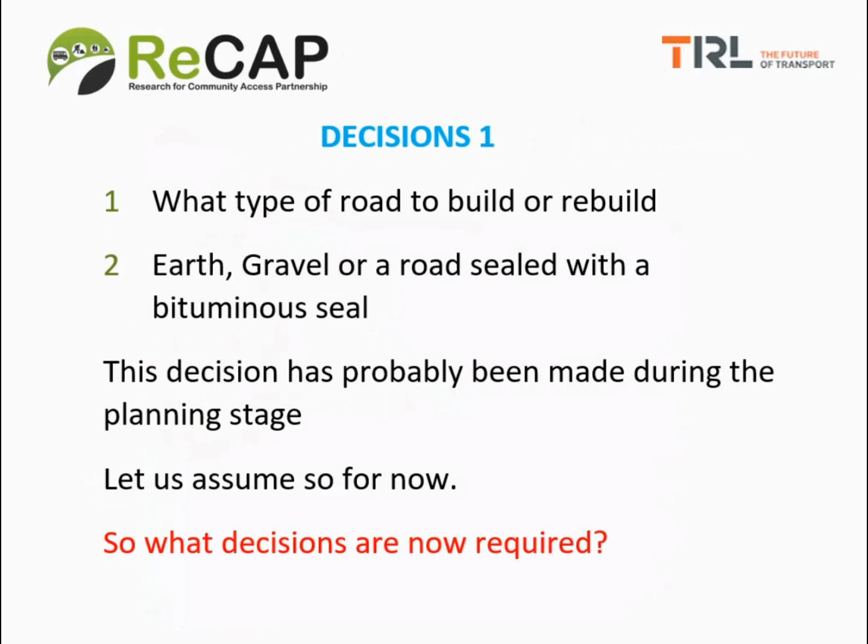So what decisions are required now? Well, obviously data must be collected, measurements made, gravel sources located, but these are not decisions. For example, traffic counts and axle weights are required to obtain the design traffic for all methods of road design, not just the ones we're dealing with here.

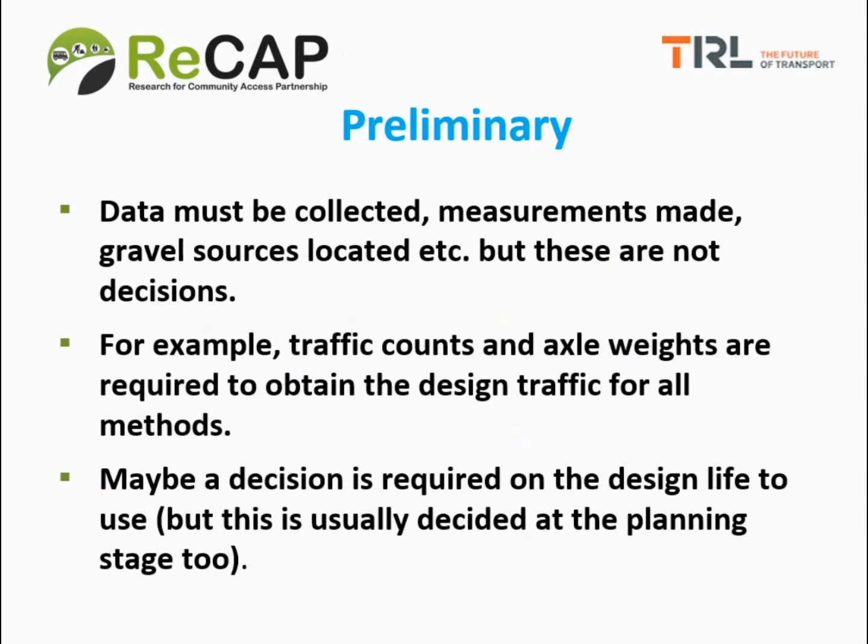Maybe a decision is required on the design life to use, but this is usually decided at the planning stage too. So let me remind you of one of the golden rules that I mentioned the other day. The first and most important point is that each method must be used in the way that the developers or authors of the method intended. This is really quite important and mustn't be forgotten.

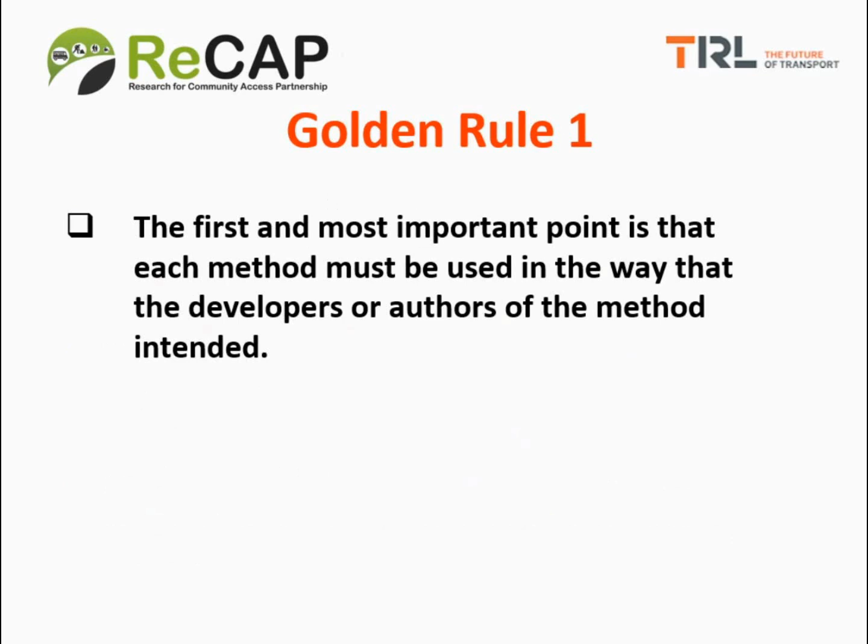So let's move straight on to the AASHTO method. The AASHTO method is slightly complicated and it will take slightly longer than the others to deal with, but there are 6 design variables that you need to have the numbers or the answers to, to do a structural design.

You need to know the design life in years. You need to know the design traffic, which is the cumulative equivalent standard axles in the heavily loaded direction during the design life. You need to know the subgrade strength in terms of its elastic modulus. You must remember that the AASHTO method is an American method, so the units are not metric, they're imperial. So the subgrade strength in terms of elastic modulus is in pounds per square inch. It's roughly equivalent to 1,500 times the CBR, so it's quite easy to calculate.

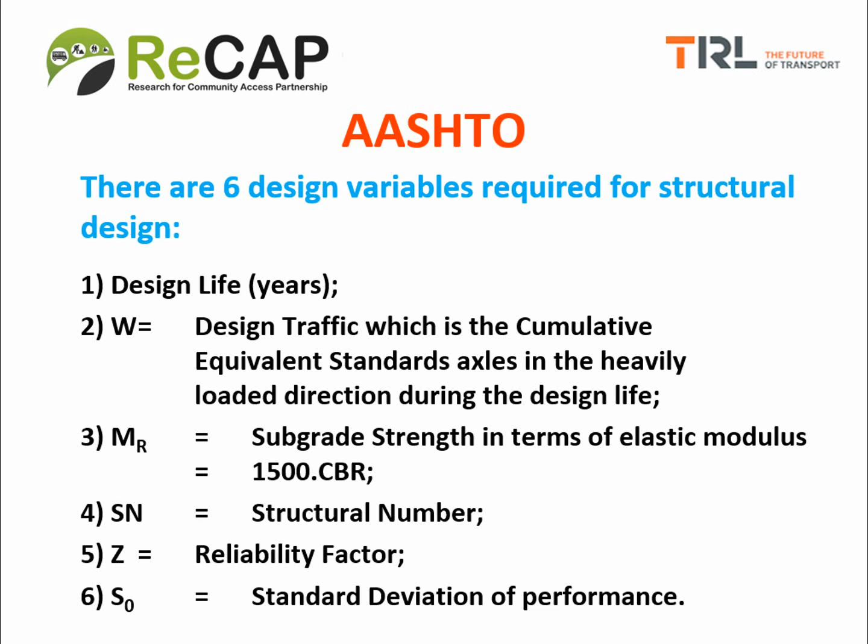We need to know something called the structural number, which I mentioned the other day, and then 2 factors that you're probably not so familiar with. It's called the reliability factor Z and the standard deviation of performance S0. So without more ado, let's get on with the design.

The AASHTO design equation looks very complicated at first sight. If you look at this on the screen now, you'll see that there are 5 terms only, which is not so bad. I've labelled what they are. The one on the left is the traffic.

Layer thicknesses come into the structural number in the middle. The terminal condition is the level of roughness or smoothness, or whatever way you decide the road is in need of repairs, and the subgrade strength is on the right hand side.

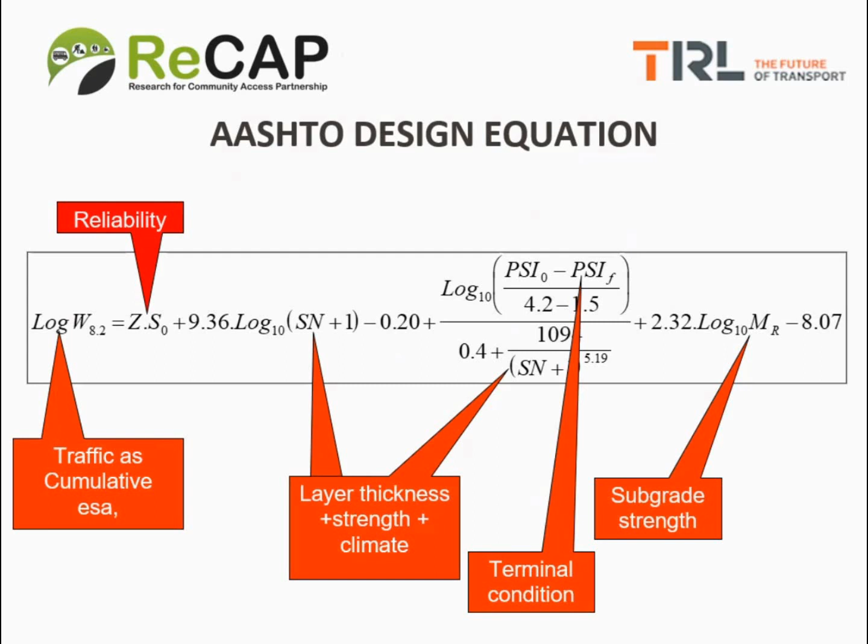Now, the fortunate thing is if we choose the terminal condition to be what is called a PSI of 2.7, that's pavement serviceability index, that middle term completely disappears and we end up with a much simpler equation. In other words, we now have this equation that has only 4 terms in it. So that makes it a lot simpler.

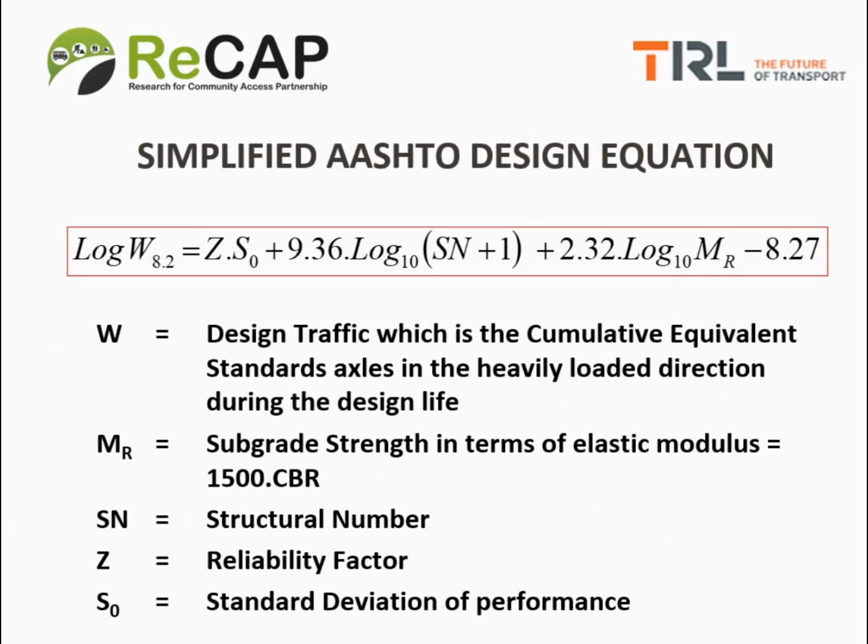The list of what those variables are is on the screen again to remind you. Right, we simply have to determine the value of these variables one at a time and enter them into the equation. The design traffic is fairly standard. I think you'll all be aware of how to do that. We need to know the numbers of vehicles and we need to know their axle loads, and it's a fairly standard method in all pavement design methods.

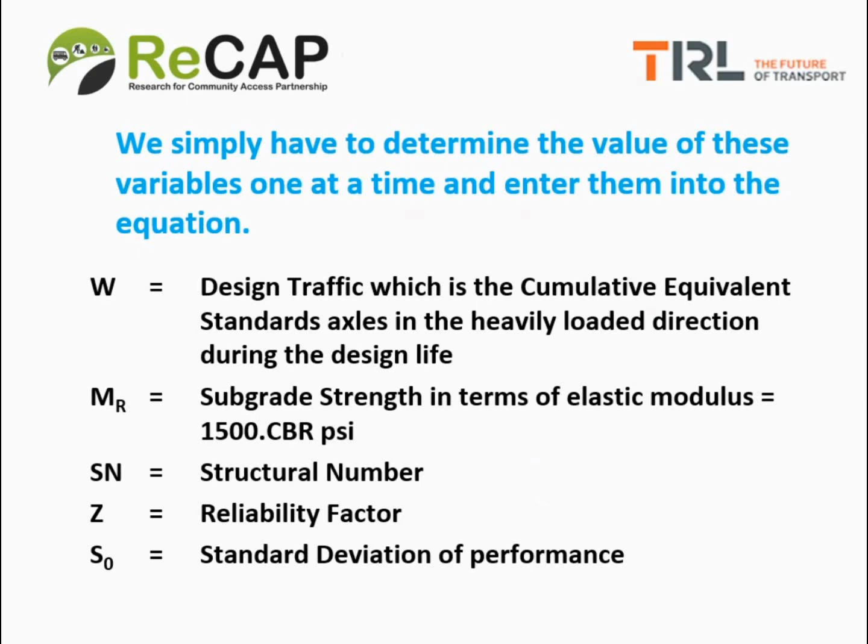The subgrade strength in terms of its elastic moduli, as I say, it's 1,500 times the CBR in pounds per square inch. The structural number and the reliability factor and standard deviation, I'll explain those in a moment and give you some numbers to put into the equation.

So let's start. The first thing of all, the design life. For this particular example, we'll say it's 15 years. We have the axle load and traffic information, so we can calculate the traffic. And for this example, the expected traffic in millions of equivalent standard axles, W, is 0.45 million standard axles.

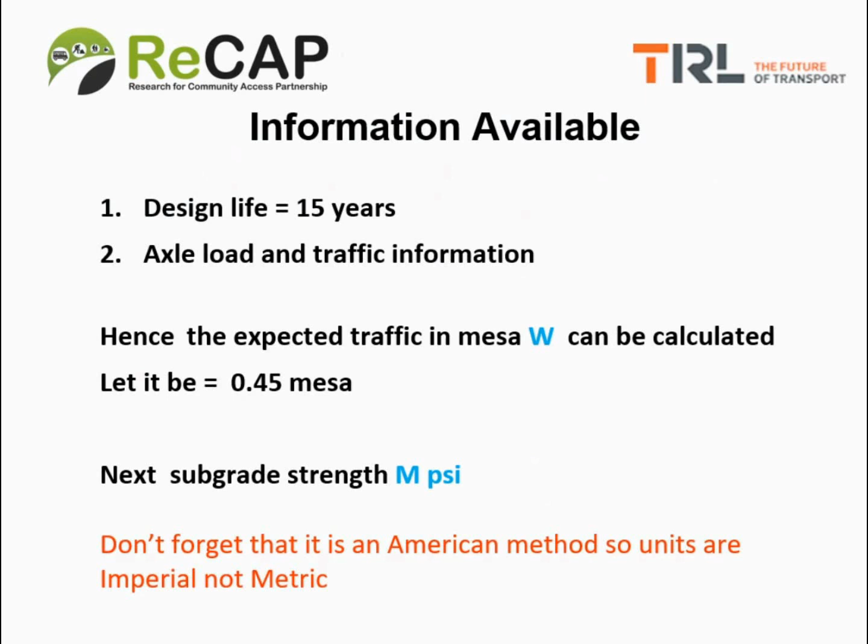The next item we need is the subgrade strength.

In principle, the subgrade strength should be the weighted average of the subgrade strength over the whole year, correctly weighted according to the design equation. But this is actually quite complicated because the design equation is non-linear. So in general, people shorten this a bit, and the best way is to take the wettest few months of the year and average those, and that's the example I've quoted.

Before we can calculate the structural number from the design equation, we have to choose the statistical variability factor S0 and the reliability factor Z. S0 is essentially the standard deviation of the empirical data obtained when we compare the performance of identical pavements over a number of years. Basically, it's a measure of the variability in performance that you get with real pavement design.

Unfortunately, it is quite large. I think the range typically on the AASHTO road test between the good performers and the poor performers of relatively identical pavements was about a factor of 4 or 5 in traffic. So that's a huge difference. It's a very real problem with designing roads.

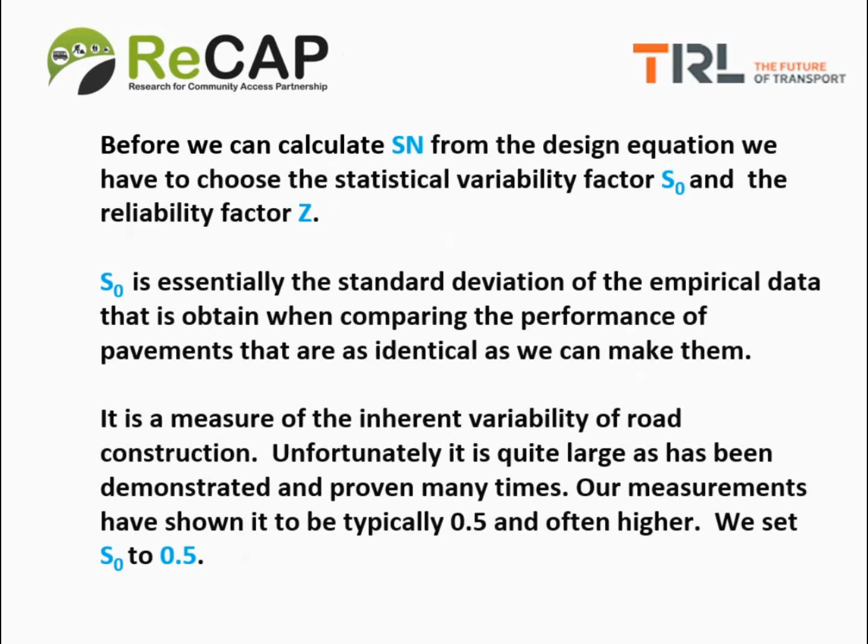Our measurements have shown it is typically 0.5 and often higher. For this particular example, we'll set S0 to 0.5. You'll see how that affects things in a moment.

The Z factor is called the normal statistical deviate. In other words, if you remember your normal distributions, standard deviations, and so on, it's how you get your probability of reaching a particular value. If we set Z equals 0, we're basically dealing with the mean values. And obviously, if we use mean values, 50% of the time our road will fail before that, and 50% of the time it will last longer.

If we set Z to minus 0.841, there will only be a small probability of this happening. It's effectively quantifying our risk. So for low volume roads, typically we would set Z at minus 0.841. This would give us a 20% probability of possibly not lasting the design life, but an 80% probability of exceeding it. For higher volume roads, we would change that to 95% or even 99% for very heavily trafficked roads. But 80% is fine for low volume roads.

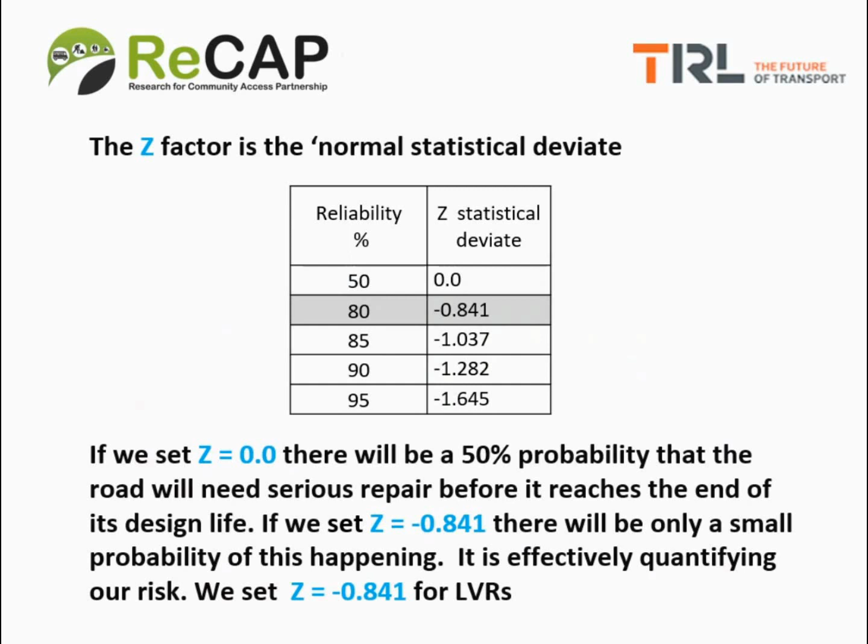So we set Z equals minus 0.841, and now we have everything we need. We've got MR, we've got W, the traffic, we've got S0 and Z. The best way to calculate the structural number is to use an iterative process, unless, of course, you programmed your computer to solve that equation for SN.

But it's much easier to do it the other way around, have the equation telling you what W is equal to when you put these various numbers in. Plugging in structural numbers around 2, between 2 and 3, you'll quickly come to the result that to get a traffic of 0.45 million standard axles, you'll need a structural number of 2.52.

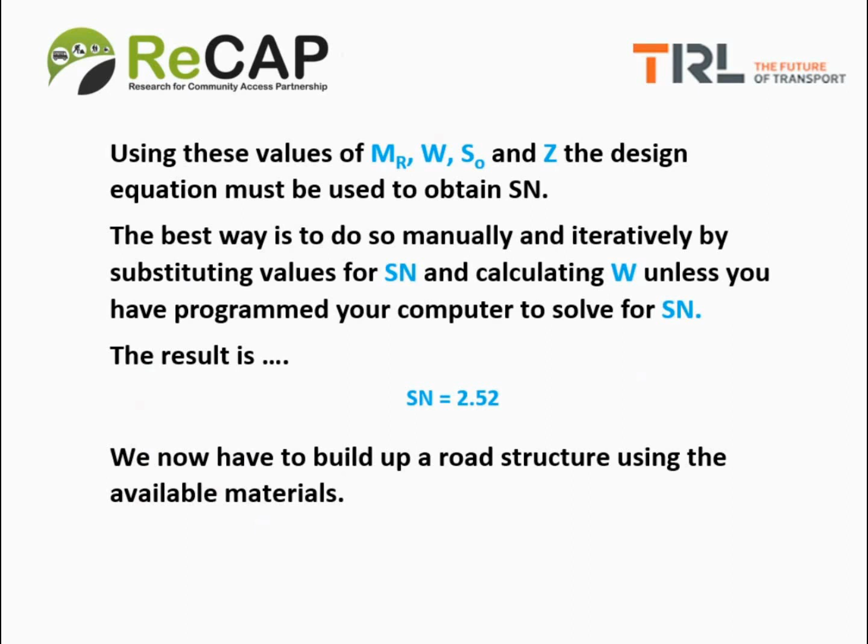Now we have to build up a road structure using the available materials. We haven't discussed materials yet, but Andrew has mentioned materials earlier in the lecture course. So let's press on. Strangely enough, and most people are a little bit surprised by this, the 1993 AASHTO Guide for Structural Design of Roads does not recommend material qualities in the same way as most manuals. Most manuals will have specifications for materials in them. In fact, to quote the AASHTO Guide, it says no specific quality requirements are presented in this guide.

The specifications included in the AASHTO Manual for Highway Construction are often used. Well, basically what we use is the specifications that we've been familiar with for many years, several years, that we've been using in our other design methods, and they are quoted in the manual in table 3.4 and 3.6.

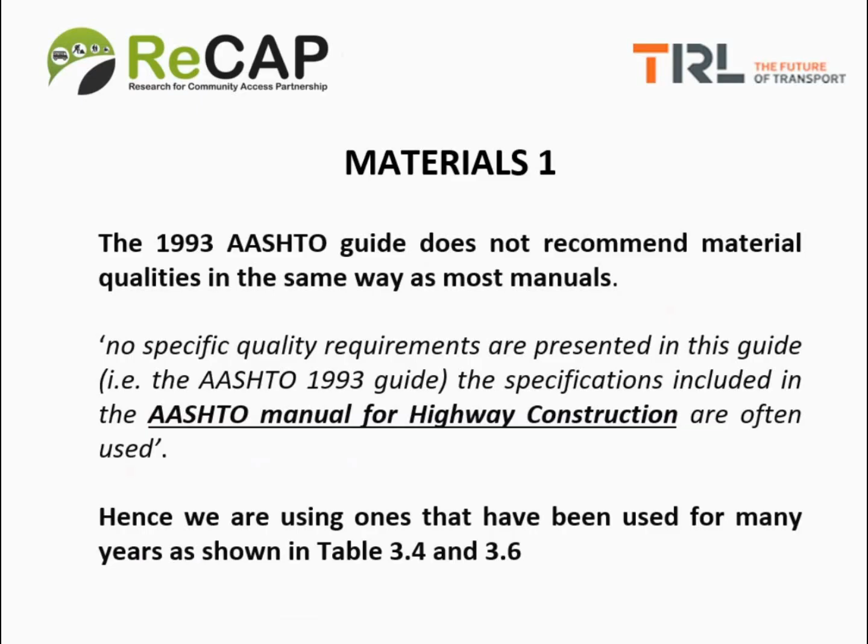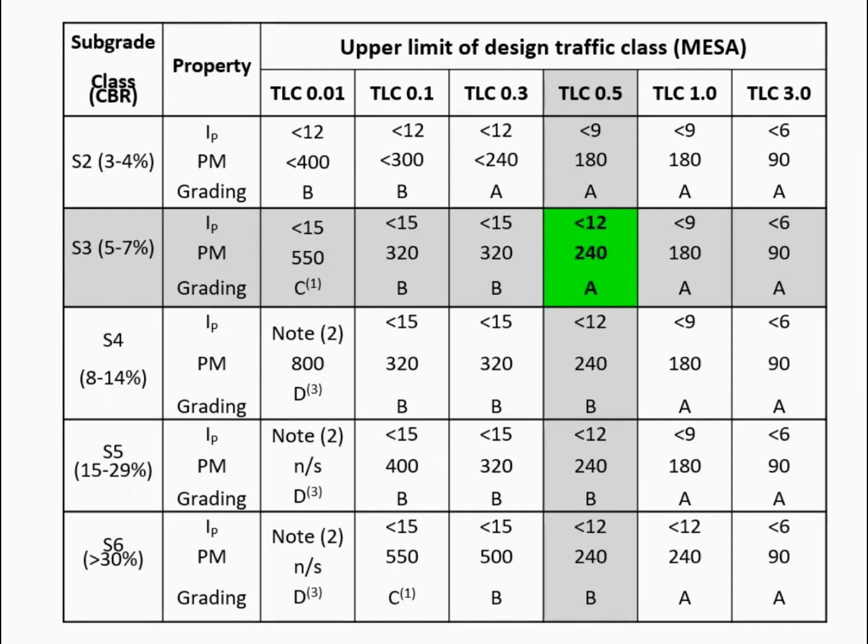If we look at the available materials, in this example we've got gravel A, which has a plasticity index of 10, a plasticity modulus of 200, and a particle size distribution that meets grading A from table 3.6. It has a CBR at specified density of 65 and costs $40 per tonne. That's labelled green here because it basically meets the specifications.

Gravel B does not meet the specification for road base. The plasticity index is slightly too high, the plasticity modulus is too high, and the grading is grading B, which is not good enough for this road. As you can see, the CBR is right on the cusp between one class and another, at 60%.

That is a cheaper gravel, $27 per tonne. The third gravel, C, is weaker than the others. It only has a CBR of 35, a plasticity index of 14, and a plasticity modulus of 300. That is adequate for capping, but not good enough for sub-base or road base.

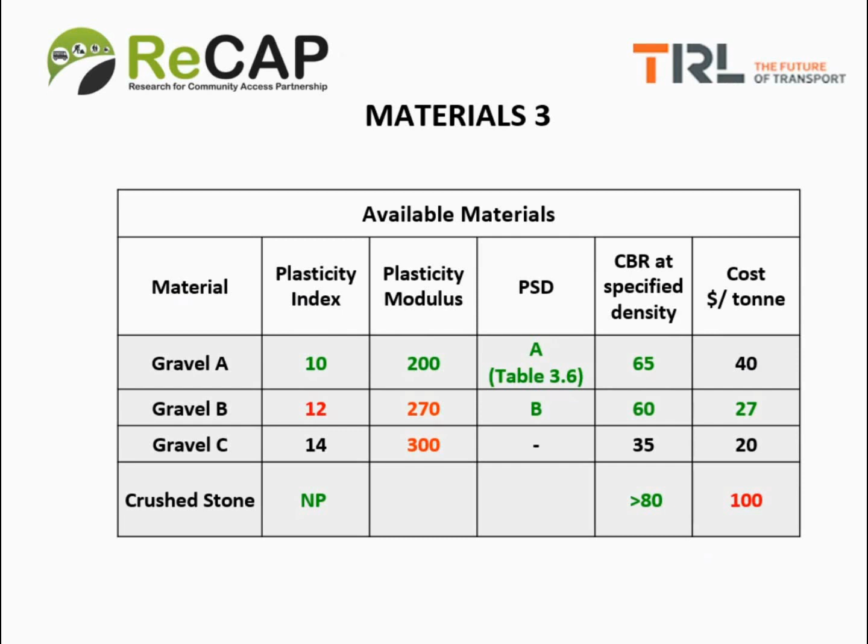And of course, if we really cannot find any locally available materials, as a last resort we could possibly use crushed stone. That would be non-plastic, and as you can see from the cost, it is 2.5 to 3 times more expensive than the others. So obviously using locally available materials is the answer to keeping the costs down.

So we choose materials for the road base and sub-base. The red fails the specification test, the green passes. Therefore, gravel A is for road base, gravel B is suitable for sub-base, and gravel C is suitable as a capping layer if we need one.

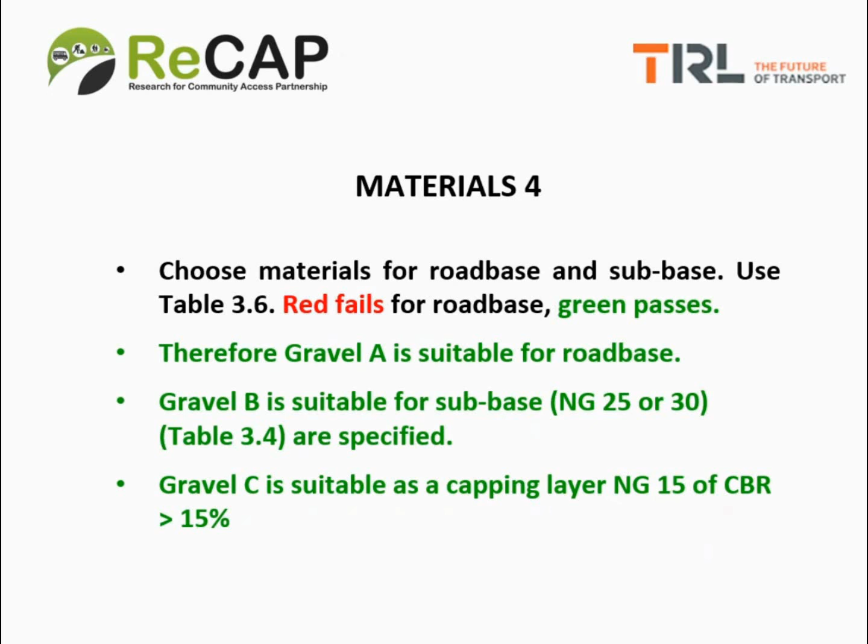So we've now got all the materials that we could possibly use, and we know what structural number we need. All we have to do is put these materials together in such a way that they create a pavement of structural number 2.5. Before we go on, it's worth checking to see if there are any other materials that might be suitable but less expensive.

These are the materials that somebody has come along and said we've got quarries for, but it's worth asking around to see if there's anything cheaper. Always worth doing - the local people will know where other materials are available.

So this is the summary of the materials. The road base material has a CBR of 65% at the design density and soaked moisture content, and a strength coefficient according to the AASHTO charts of 0.12. The sub-base has a CBR of 35 and a strength coefficient of 0.10. The A1, A2, A3 coefficients are obtained from table 5.1 in the road note.

All we have to do now is compile a pavement with a structural number of 2.52. This is done essentially by trial and error - there are no rules of thumb here.

We obviously want to make sure that the layers are of thicknesses that can be constructed easily - thin enough to be compacted well, but not too thick that they cannot be compacted properly. We're all fairly familiar with the thicknesses that means.

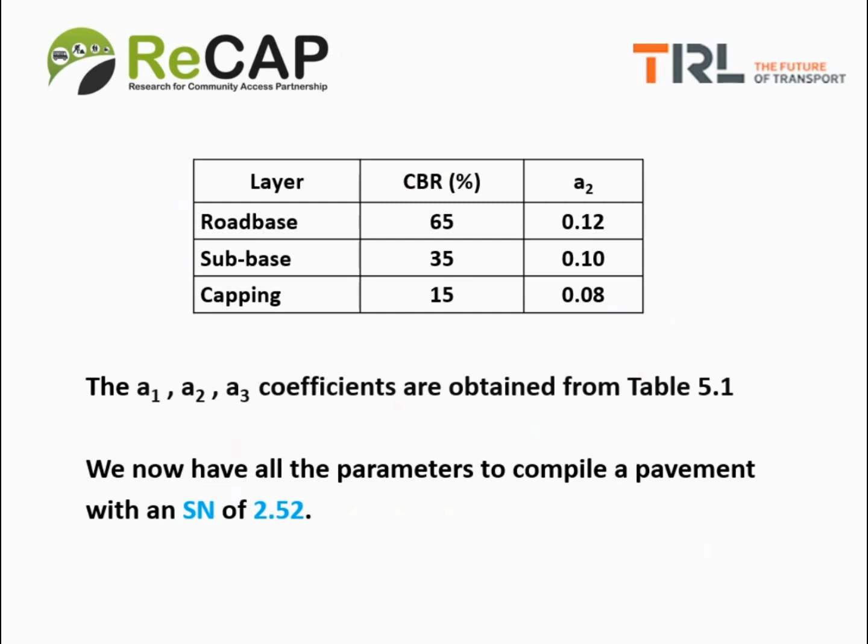The next slide shows you - well, sorry, we have another effect to take into account, and that's climate. I apologise for not mentioning that before. You remember from the lecture the other day that climatic conditions are taken into account through M multipliers that are used to multiply the strength coefficients.

In very wet conditions, the M values are greater than 1, which means the structural number you require increases. In very dry conditions, the M values are less than 1, so when you calculate the structural number, a lower value is needed to carry the traffic. Essentially, these are calibration factors for your local climatic conditions. I can't give you the answers for everywhere - you have to do it yourself.

An important feature in the original AASHTO design method was something called a regional factor that simply multiplied things, multiplied everything, but that was not considered precise enough.

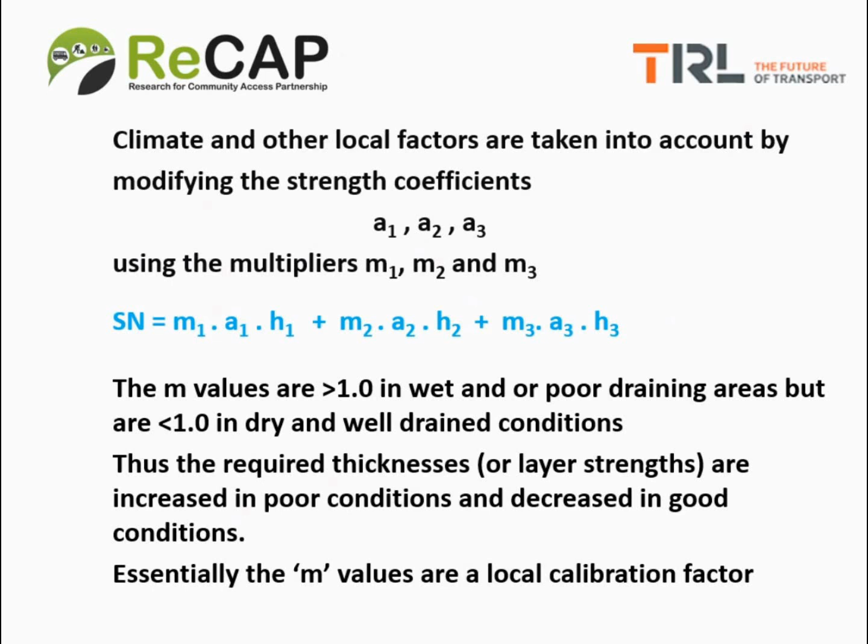So these multipliers, these local factors, are now the way it's done. Remember that the climate is not severe, as we mentioned very early on. The annual rainfall is moderate, so we set the M coefficients to 1.0, which in this example makes it fairly easy. Now, there are many combinations of layers and their thicknesses that can make up the structural number, but we choose thicknesses that are easy to compact well.

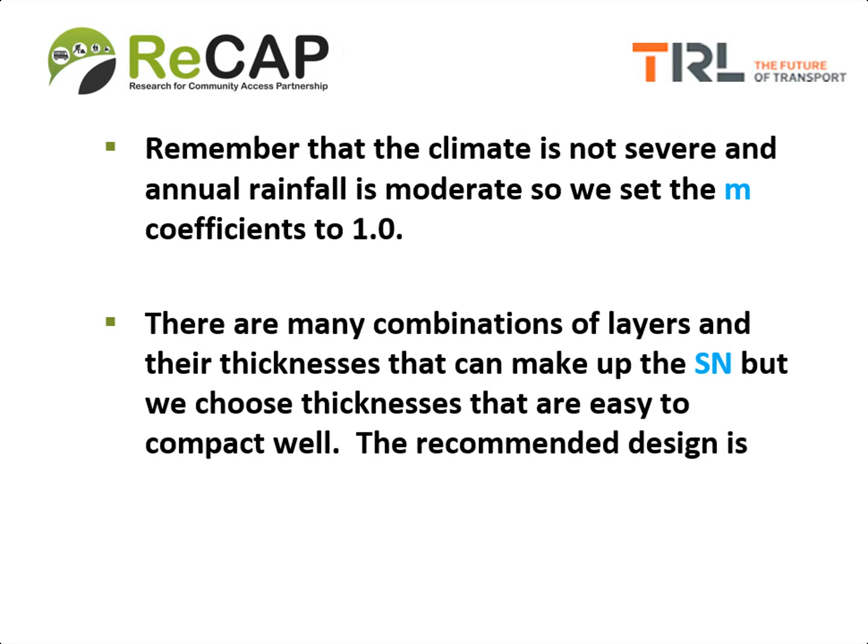The recommended design is as follows: the thickness of the road base is 175 millimeters, the thickness of the sub base is 200 millimeters, and we need a capping layer to get a structural number sufficiently high, requiring 250 millimeters of G3 as a capping layer. This, if you can see from the sum, gives you a structural number of 2.49, which is close enough to 2.52 to be perfectly suitable.

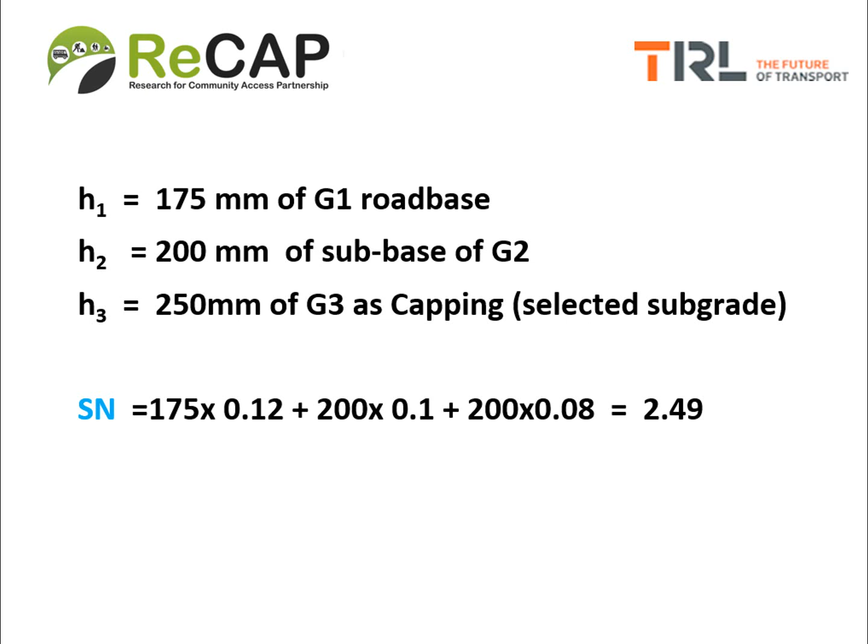Now, this pavement is quite substantial and considerably thicker and stronger than normally we would consider necessary for a low volume road. Don't forget, I'm just applying the AASHTO method. But the AASHTO method has several ways it can be calibrated based on local road performance experiments. In other words, although the way the Americans might use it is conservative and gives you a fairly thick structure...

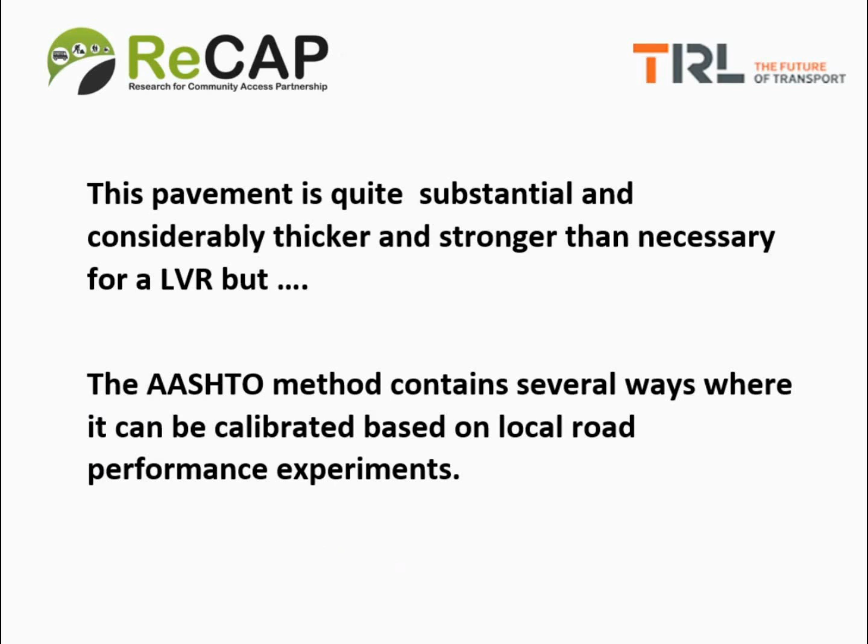We can vary things depending on climate, we can vary the M coefficients, we can vary the S0 term, we can design for a different level of reliability. So there are, as I say, 3 or 4 ways in which it can be calibrated for your local conditions, and that is what most users have to do.

Now, that looks like a relatively complicated design method, but most design methods are rather more user-friendly and easy to use. Almost all design methods can be used in what I've called desk study mode. You can use your design method to design many hypothetical roads to provide enough information to fill a whole catalogue of structures. So you can vary your subgrade strength, you can vary your traffic level, use the design method and come up with some structures.

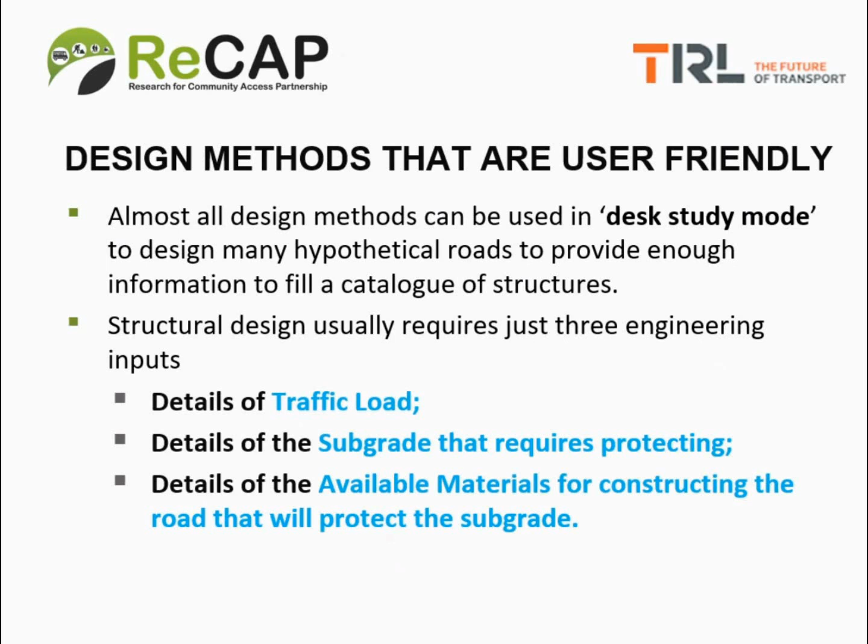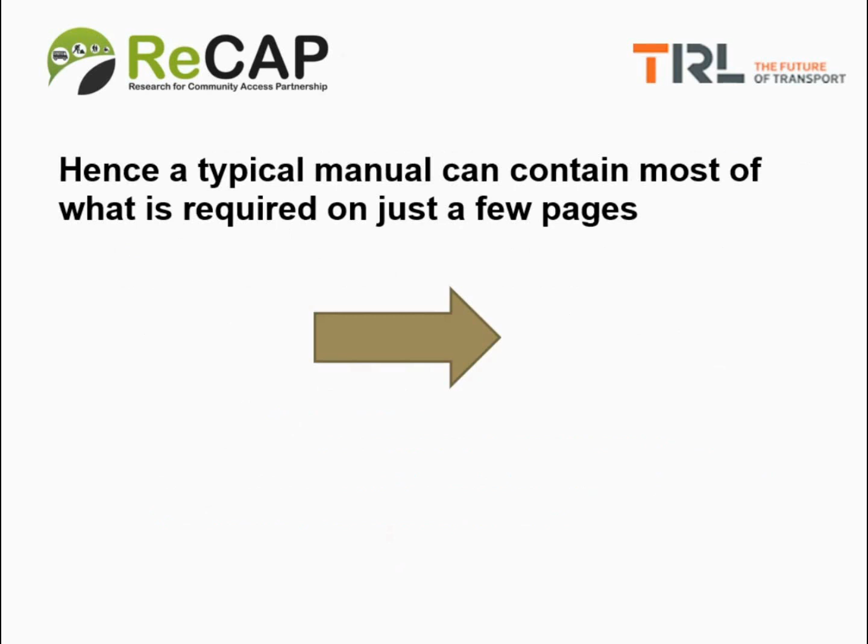And then you put those structures all into your design manual, and they become very easy to use. What you need to use them is the traffic load, the subgrade strength for design, and we need to know about the available materials for constructing the road sufficient to protect the subgrade. So if we look again, a typical manual can contain most of what is just required on just a few pages. You've done all the calculations in your desk mode, and now summarized them all in your manual, which can be literally 2 or 3 pages.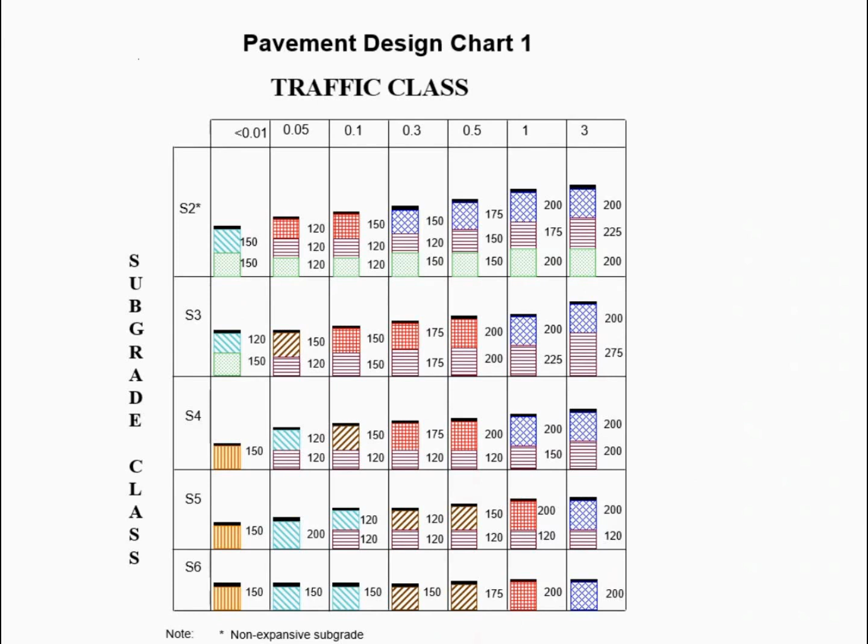Before we go on, I'd like to remind you that this is basically a CBR-based method. In fact, most of the methods in the manual are CBR-based methods, but we are also looking at the DCP-based methods. The DCP method can be used in exactly the same way. A catalogue of structures like this can be built up instead of using CBR, but using the DN value. And the next slide shows exactly what that manual looks like.

Again, the traffic is along the top, ranging from 0.01 million standard axles up to 1 million. The layers are down the side. The subgrade is essentially the bottom layer. And these numbers are the number of millimeters per blow of the DCP that material has to withstand. So those are maximum values.

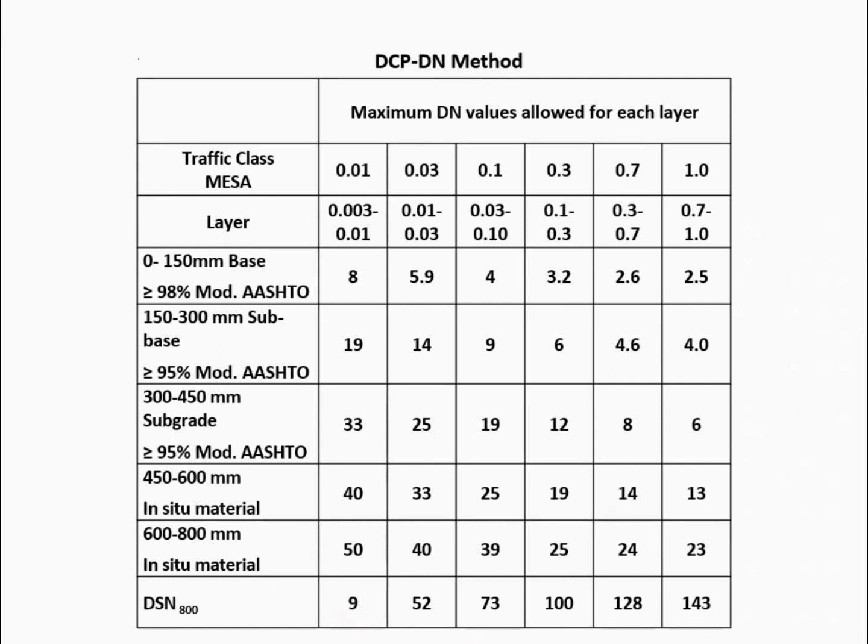That is exactly the same essentially as the previous slide. Instead of CBR, you have DN and the various layers down the side. So very simple.

To complete this little demonstration today, I'll prove what I've just said. I'll use the information about the traffic, subgrade, climate and materials from the AASHTO example, and I'll design for 0.5 million standard axles in a moderate climate using the TRL SADC design charts.

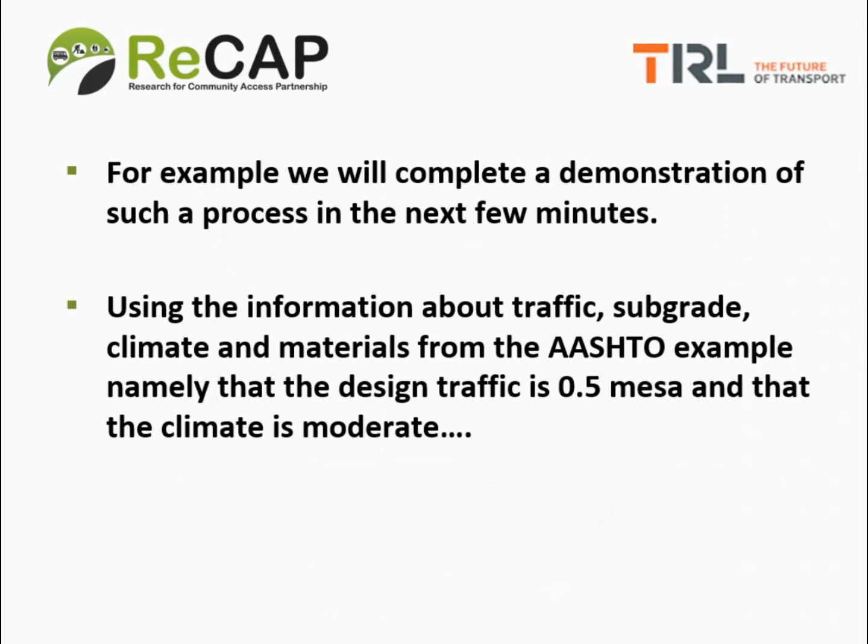To use the TRL SADC guide, the only additional information we need is that the subgrade needs to be assessed in a soaked state, so samples are required that will be tested in the laboratory at the appropriate density and soaked. That is not to say we believe the subgrade will be soaked in practice. We're soaking it simply to classify the subgrade quality for that particular road.

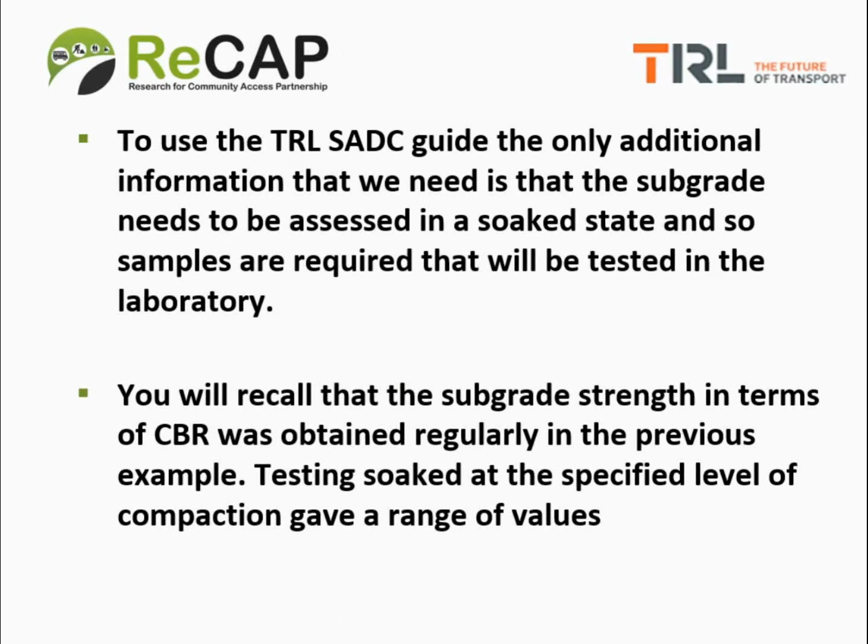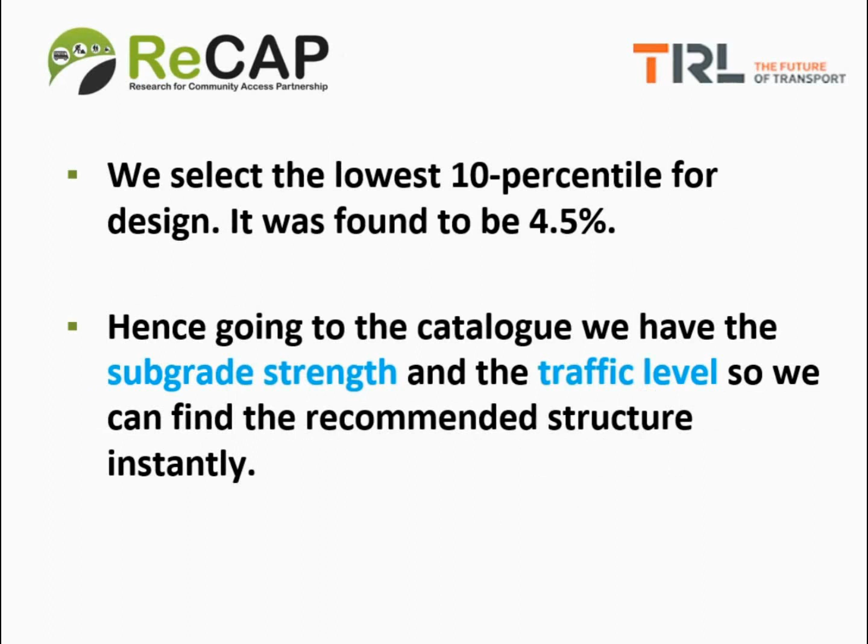You'll recall that the subgrade strength in terms of CBR was obtained regularly in the previous AASHTO example. Testing soaked at the specified level of compaction gave a range of values. Now, we don't want to use the mean value, because that means half the road will be on a weaker subgrade. We need to use the 10 percentile, so that 90% of the road is on a stronger subgrade than the worst 10%. So now we go into the catalogue, we have the subgrade strength and the traffic level, and we can find the recommended structure very quickly.

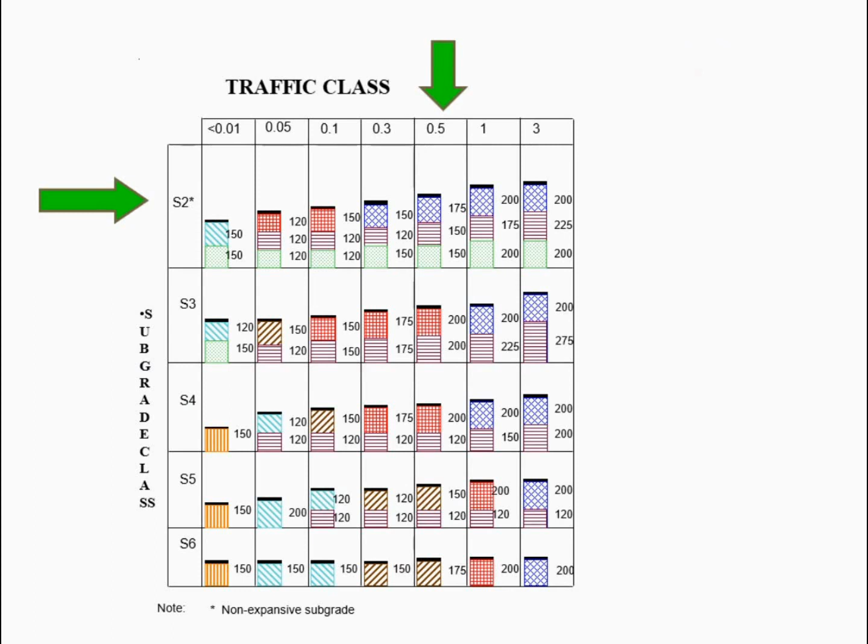There is the catalogue of structures. The traffic level is, as we remember, 0.5 million equivalent standard axles, as shown by the green arrow, and the subgrade strength, measured in the soaked state, is class S2. So the structure we need is 175 millimeters of road base, 150 millimeters of sub base, and a capping layer of about 150 millimeters on this relatively weak subgrade. You'll notice that that is considerably thinner than the structure we arrived at from the AASHTO method.

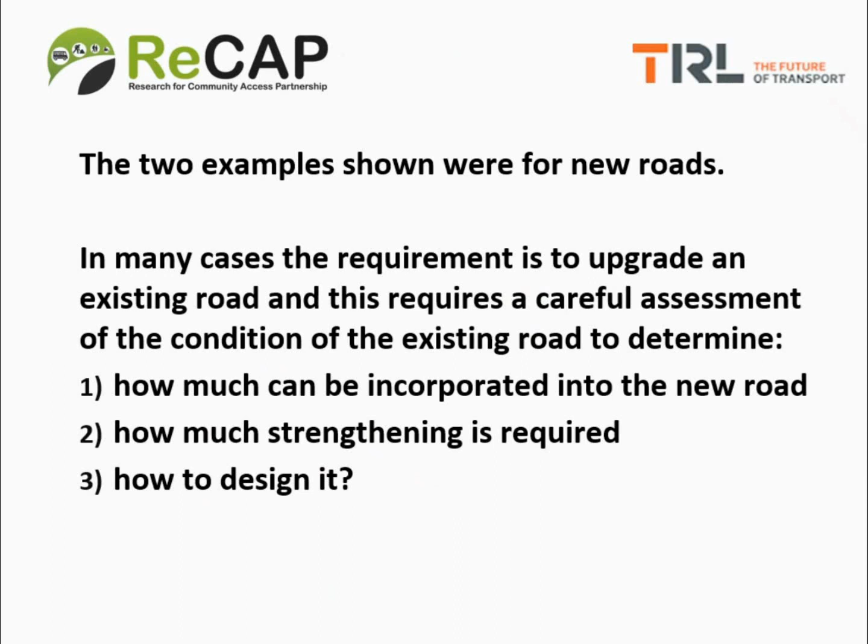Now that example and the AASHTO example were for new roads. In many cases, the requirement is to upgrade an existing road, and this requires a careful assessment of the condition of the existing road to determine how much can be incorporated into the new road. Most of the time we hope that most of the layers can be included, but we need to know how much strengthening is required so that it can carry the new traffic level for the next 15 or 20 years, and how to actually design the strengthening.

So the two methods we recommend, or show in the manual, are the TRL DCP CBR method based on Road Note 18, and the DCP DN method. Both methods include an assessment of the existing road, and both are very similar in terms of testing materials, except for one major difference: the DCP-DN method does not use the CBR test at all. It replaces CBR testing and CBR values with DCP testing and DN values, including for the material strengths in the associated structural design catalogue that I showed you earlier.

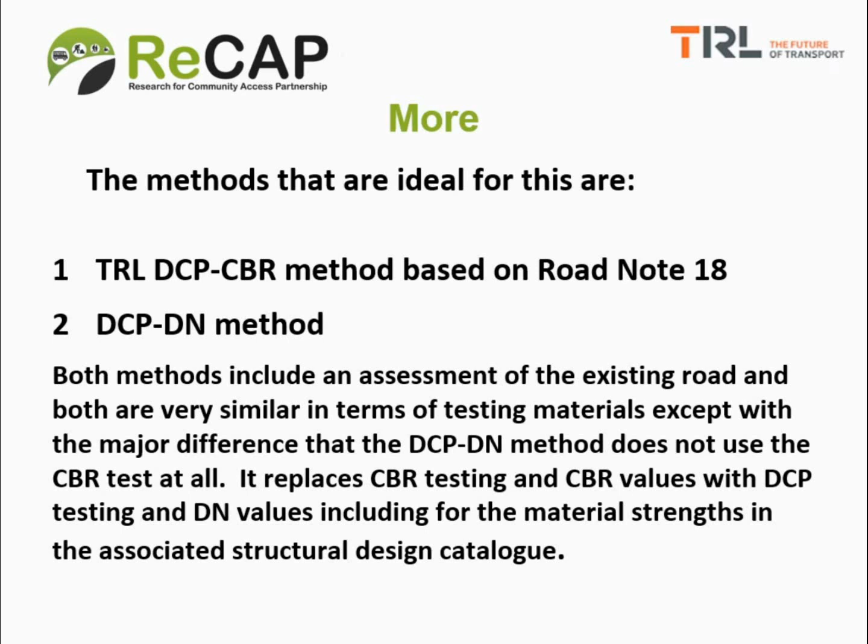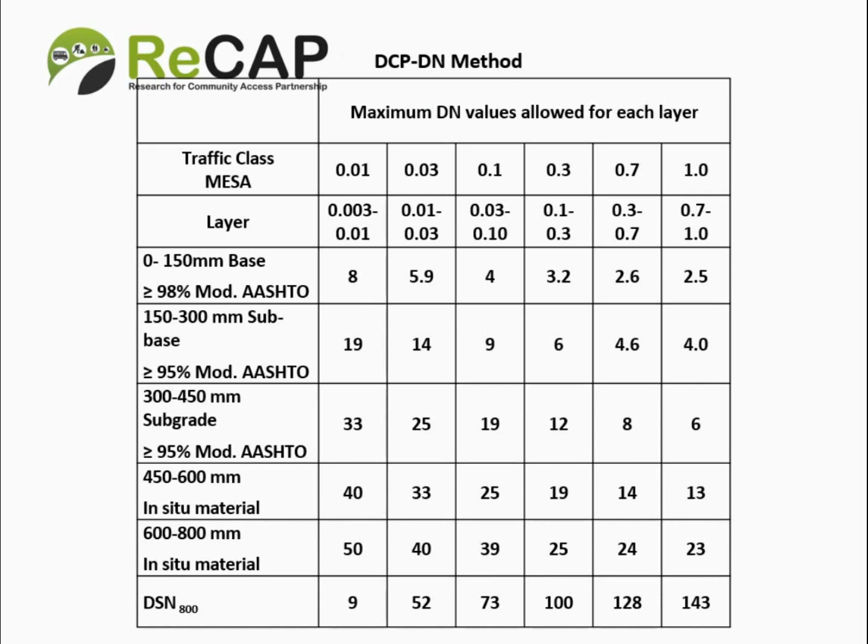Again, very simple to look up the chart. Obviously, when you're actually doing the calculations and looking at the existing road, there's quite a lot more to do, which will hopefully be apparent to you when you try it, because both methods have an associated computer program that you could all use very quickly with a little bit of practice. And essentially that's it. Thank you for your attention.